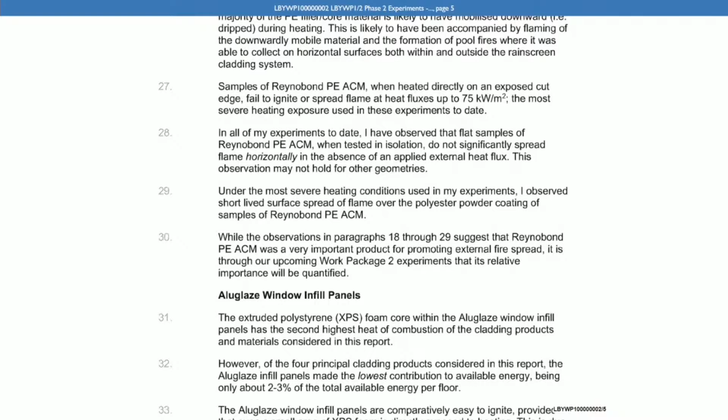That's a very difficult question to answer. The footage that we assembled at phase 1 didn't show any obvious surface spread of flame over those panels in the early stages of the fire. As the fire grew, it's very hard to say where that spread of flame was occurring, whether it was a consequence of burning of the polyethylene core or a consequence of the powder coat. So that's a very difficult question to answer. The amount of energy that would be liberated by any burning of the surface coating would be very, very small in comparative terms if you compare it to the amount of energy that can be liberated from the polyethylene core. So I wouldn't think, and I think I intimated as such in my report, that this is a hugely significant observation.

Then if we look at the heading below that, it says Aluglaze window infill panels. Let's look at paragraph 33 there, still on page 5. You say: the Aluglaze window infill panels are comparatively easy to ignite, provided that even a small area of XPS foam is directly exposed to heating. This is due to the low thermal inertia of XPS foam. It is noteworthy that the low thermal inertia is also the reason that XPS foam is desirable as a thermal insulation in buildings.

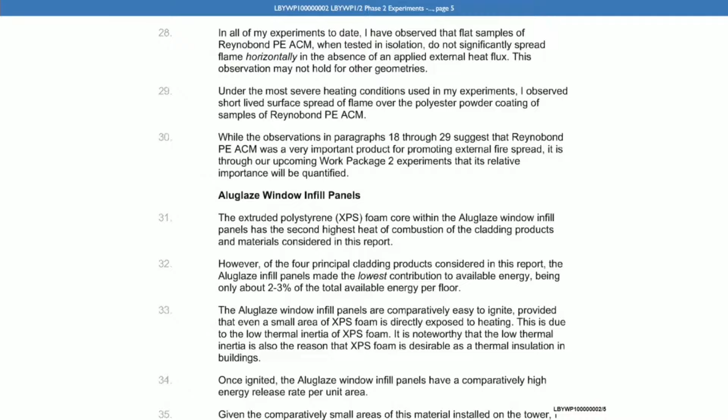Now, given the conclusions that you've derived from your experiments in relation to the Aluglaze infill panels, are you able to reach any conclusions on the potential contribution of the ignition of the Aluglaze infill panels to the ignition of other elements of the facade?

Again, challenging to say definitively. The reason that comment is in there is because we have evidence from phase 1, from memory, that suggests that the extract fans located within small pieces of infill panel, essentially the same product, in the kitchen windows of the flats, flat 6s all the way up the building, softened and fell out quite early on in the fire. And certainly the footage that we have from the fire of the kitchen window of flat 16 early in the fire suggests that the extract fan had fallen out, and there you can see a circular hole in that small panel of window infill panel material.

If the extract fan falls out of that infill panel, then around the circumference of the hole where the fan was sitting, you will have had exposed XPS foam insulation. That foam insulation is quite likely to have both softened and melted and dripped and ignited, and will have contributed to burning in that location and will have contributed to flaming that is likely to have impinged on the ACM. So that's quite a long-winded answer, but I think the answer is it's certainly possible that ignition and burning of the XPS core of the window infill panel that was holding the extract fan will have contributed to some extent.

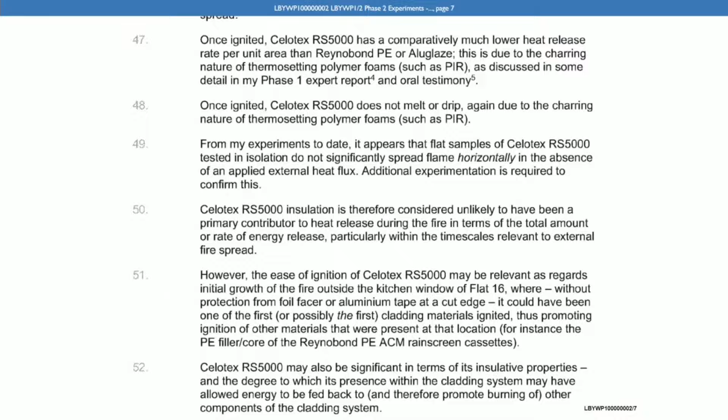Can you explain the mechanism by which the ignition of the RS5000 may have promoted the ignition of the PE filler, PE core of the Reynobond PE ACM?

Simply that if something ignites and starts to burn, then it's going to liberate energy. That energy is going to go somewhere, and if it goes into the ACM, heats it and starts to mobilize the polyethylene, which can then ignite, that would be the mechanism. The mechanism is simply that burning of the insulation liberates energy that could then be used to heat the ACM and cause its burning.

And what about other elements of the facade? There were other things in the cavity. You had the UPVC window frames, which would have been adjacent to that location, which can burn. You will have had EPDM rubber membrane around that location, which can also burn. You had spray foam, bits of timber, various other things in the cladding system at that location.

So there's a variety of things that could burn in that location, which is one of the reasons why I say it's very hard to say with any certainty what was the first item ignited, and whether the first thing ignited would have continued burning in the absence of the other things is really difficult to unpick.

Are you able to quantify the amount of energy that the RS5000 would have allowed to be fed back to the other cladding components? As I sit here, if we're talking specifically about the configuration that existed at Grenfell Tower, I think no is probably right. I certainly wouldn't want to attempt it as I sit here.

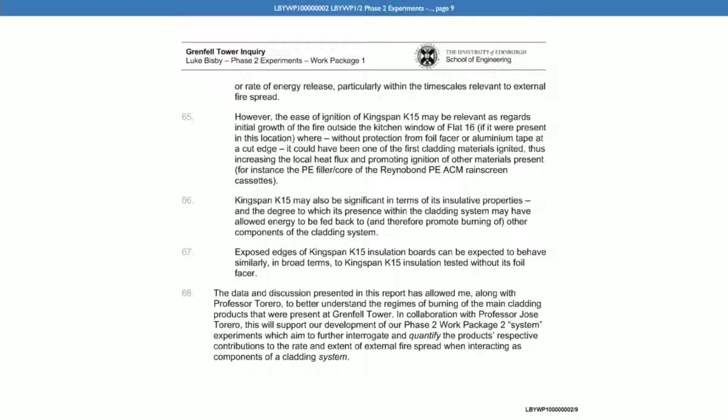And when you say 'could have been,' would you give the same answer in response to the question of quantification? That's right. Yeah, yes.

And if we go to page 26 of this report, please. Page 26, you say this at paragraph 165, at the top of the screen: unlike polyethylene, both PIR and phenolic polymer foam are thermosetting polymers, i.e. they will char on heating rather than melting and dripping or flowing. As a consequence, it is the extent to which PIR and PF foam ignite and spread flame over their surface that is of primary interest, along with the extent to which they do or do not continue to contribute to heat release and flame spread over the timescales relevant to consideration of external fire spread during the Grenfell Tower fire.

Now, given the absence of melting, dripping or flowing from PIR and phenolic polymer foams, what is the mechanism by which the PIR and phenolic foams contribute to the external fire spread?

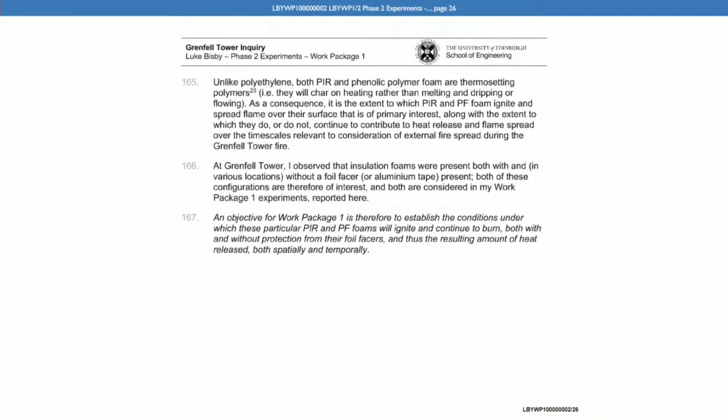By insulating the cladding system and making sure that the heat is retained within the system and fed back to the ACM, which exacerbates the burning of the ACM, and by liberating some admittedly small amount of energy via their own combustion, potentially by spreading flame, although I think the flame spread characteristics are probably not that significant, particularly if you had a foil facer in place.

Yes. Now, if we then turn to page 27, paragraph 169, under the heading Products and Materials Under Investigation, paragraph 169: I decided, however, not to use the cladding products removed and retained from Grenfell Tower for my Phase 2 experimental programme. I made this decision because I felt that I would be unable to guarantee adequate control by others, either of the chain of custody for these products or the specific origin of the various samples, nor could I be completely certain that the products had not been damaged in some way due to their installation on the tower, their in-situ service experience, some exposure to heating during the fire, or mechanical damage during their removal.

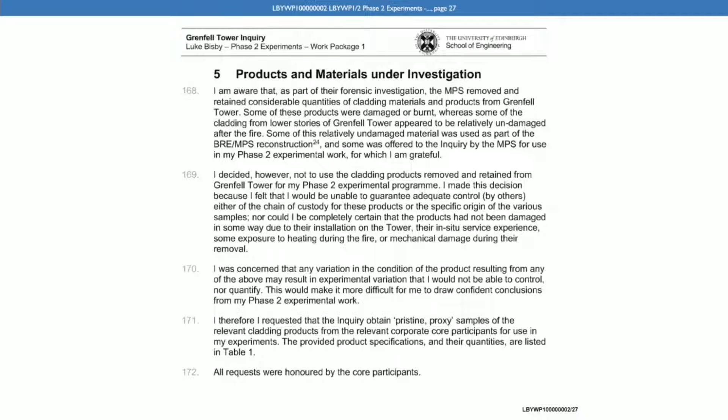Do you consider that, as a consequence of that decision that you've described there, you would have been unable to take account of any alterations or modifications to the cladding products which resulted from the manner in which they were installed, or the means by which they were affixed to the facade of the tower?

None of the experiments that I've performed intended or even tried to simulate or reproduce those issues in any way that I would say is directly applicable to Grenfell Tower. We were much more interested in understanding the mechanisms by which the different behaviors would be, and then the mechanisms by which those behaviors would manifest in the product. So no, I don't think I would agree with that statement.

Right, but focusing on the consequences of your decision not to use the cladding products removed and retained, did that materially, or should that materially, affect the conclusions? No.

So do we take it from that you didn't think it was necessary to take account of the exposure of the PE core resulting from the installation of the product in cassette form?

In the experiments that I performed, we did certain things to the ACM panels, certainly in the work package 2 experiment, that were intended to ask questions relevant to whether the panels were installed in riveted form or cassette form. For instance, as I showed in my presentation, we intentionally routed the rear face of the ACM panel, the face facing into the cavity, in our work package 2 experiments, because we recognized that the separation or removal of the inside aluminium face in a cassette configuration would probably drastically affect the burning behavior, and that's certainly something we observed.

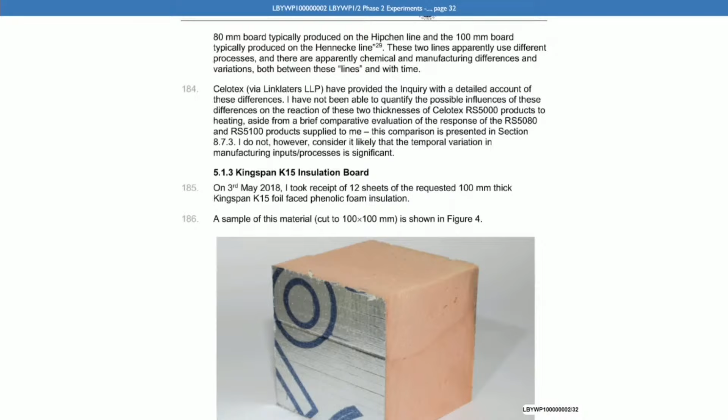What do you mean there by temporal variation?

So I'm not a polymers chemist, nor someone who manufactures polymer foams, but the base chemistry of these products didn't change a whole lot. It seemed to me in reviewing that information that there were little tweaks and changes made by manufacturing operatives, probably based on things like facility temperature or ambient relative humidity. I don't know, so I'd hesitate to put too much stock in that. If the inquiry feels changes in chemical inputs over time warrant investigation into possible outcomes for the resulting product, I'd insist the inquiry ask a polymers manufacturing specialist rather than me.

It's really the word temporal I was asking about. Yeah, temporal, I just mean in time. If you look at the data we were provided, from memory it was quite some time ago that I looked at this. There are little adjustments made to the manufacturing process over time, and I felt that was probably unlikely to significantly alter the outcomes of what we'd observe if we tested a piece of the product. It's not going to vary significantly any of the reaction to fire properties we looked at, in my view, heat of combustion, critical heat flux for ignition, those sorts of things. I wouldn't expect to see differences.

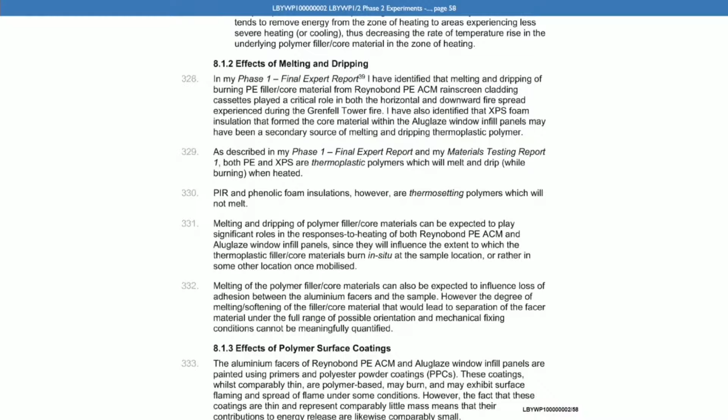I mean that it matters, in simple terms, where the energy goes, or if the energy goes. These materials - the polystyrene, the XPS, and the polyethylene - are quite calorific materials. They have high heats of combustion, and where and when that energy locked up in the material is released matters. So if you have a lot of mobilization of the polyethylene, it's no longer where it started, and where it goes matters.

So if the polyethylene drips out of the cladding and into the atmosphere and falls through the sky and lands on the pavement at the base of the building, which we did see some of, then the influence of that burning polyethylene on the cladding fire locally has been removed.

If the polyethylene drips and pools in the shelf at the bottom of a cladding cassette - these cladding cassettes on the tower, certainly the spandrel panels, the face of the panel comes down, comes in above the window, and there's a little lip on the back of that cladding.

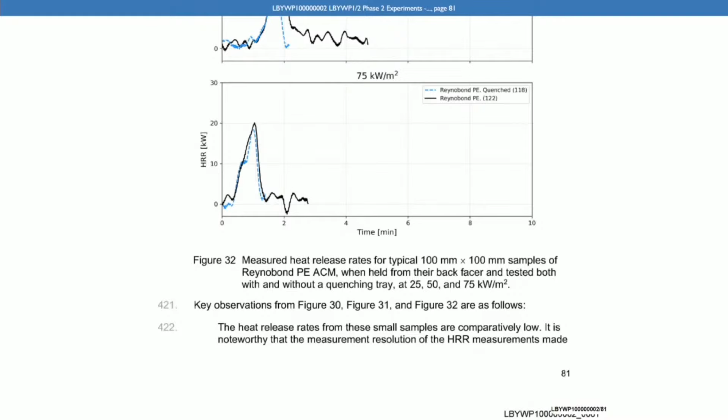Yes, 422. The heat release rates from these small samples are comparatively low, you say. It is noteworthy that the measurement resolution of the HRR measurements made by the University of Edinburgh's furniture calorimeter is insufficient to provide high-fidelity data for such low heat release rates. However, this does not affect the conclusions drawn from the data.

Then you go on to say... yes, I think that's probably enough for my question.

Is it your opinion that a feedback loop existed during the fire at Grenfell Tower? Yes, there's always a feedback loop when a fire grows. And are you able to identify the elements of the facade which would have contributed or created this feedback loop? Anything that had a heat of combustion will have contributed to some extent to that feedback loop. Right, and what would that include? Can you identify the elements?

In order of decreasing relevance, I can try to do that. First and foremost, the ACM PE, then the insulation products, whether Celotex or Kingspan at any given location. And then all of it, really - any timber that might have been there, UPVC window frames, window surround insulation, EPDM membrane, spray foam - anything that could burn will have contributed to some extent, however minor in some cases.

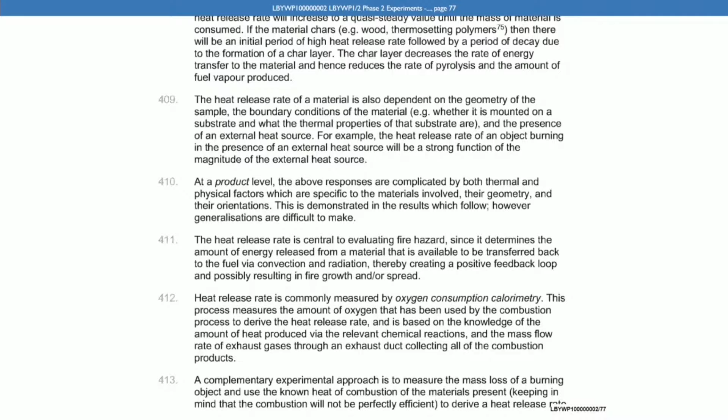Now, the heat release rate that you've generated - does that come from all of the components, or each one combined, each one individually? The heat release rate that one measures when one observes a fire is going to represent, typically, if you're measuring the way we did in the experiments in the lab at Edinburgh, the total heat release rate that comes from everything that may be burning. So yes, everything.

And when you say via convection and radiation, are you describing there - and I don't want to put words in your mouth - the effect of heating when a pool fire in a drip tray on the inside of the cassette on Grenfell Tower heats the insulation and creates rising heat, radiates but creates rising heat?

I mean, which paragraph is that in again? 411. I mean, yeah, I think 411 could be read almost without 'via convection and radiation' - those words are probably not necessary.

The key idea in that paragraph is that when you have heat release, the heat release rate is telling you how much energy is being released per unit time. And the more energy you have, the more likely it is that that's going to feed back to the fuel and cause the fire to grow. The convection and radiation are just the specific heat transfer mechanisms by which that would occur.

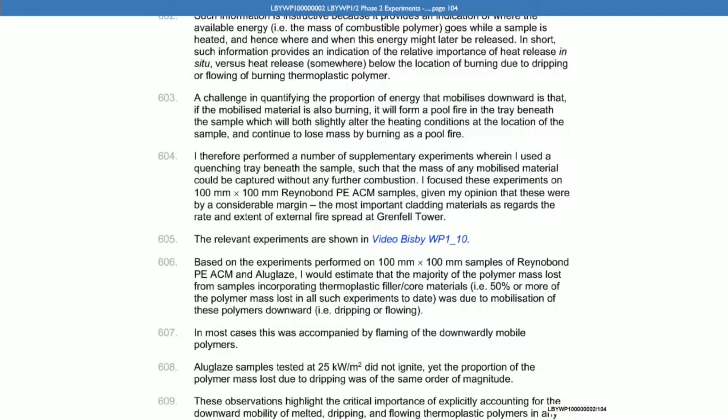Twofold. One, it would have removed energy from the local site of burning and taken that energy somewhere else, where else depends where the polymer goes. And two, in the conditions we observed, certainly for the ACM PE, that polymer is burning whilst going where it goes.

And so if it lands somewhere else and continues to burn, which it appears to have done, then that's a pretty effective downward fire spread mechanism. That's one of the reasons why at phase one I really focused in on the crown detail at Grenfell Tower. The upward fire spread mechanism is pretty straightforward.

The lateral, horizontal fire spread mechanism at Grenfell Tower, which is quite unusual compared to other cladding fires involving these products, I believe is a direct consequence of the presence of the crown, and the fact that the crown provided a mechanism by which the fire could go around the building. The downward spread from the crown is what effectively makes the fire go sideways.

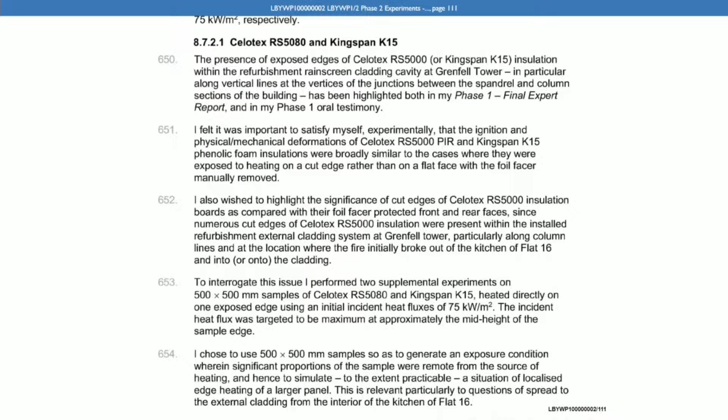I wanted to make sure that what I felt from earlier — this is the work package 1 experiment. So in the work package 1 experiments, as I discussed last week, we did experiments with and without foil facers, and we observed how the insulation products behaved under those circumstances. But those experiments were performed by taking sheets of insulation and essentially peeling off the aluminium facers, so the surface of insulation exposed in those experiments was the front face of the foam panel.

With the aluminium removed, now that is probably, but not definitively, the same situation as you have at a cut edge of the polymer foam, because of the way these products are manufactured. For the Celotex RS5080 product, you have, as I mentioned at phase 1, in-depth glass fiber meshes that are sort of in the insulation in depth within the foam. And also the aluminium foil facer is somehow adhered to the foam in a way that we've not interrogated in any way, so the peeling off may leave some residue.

So there's all sorts of reasons why I wasn't — and we know that the locations in Grenfell Tower where we were concerned about the direct exposure of the polymer foam cores of the insulation products were situations where we had cut edges, not where people had intentionally removed the facers by peeling them off. So I just wanted to make sure there was no substantive difference in behavior under those edge exposure conditions, both because they were the ones that existed actually in the tower, and because peeling the aluminium could potentially result in some differences in behavior. But we didn't observe anything I thought was particularly different, so that work was really just confirmatory.

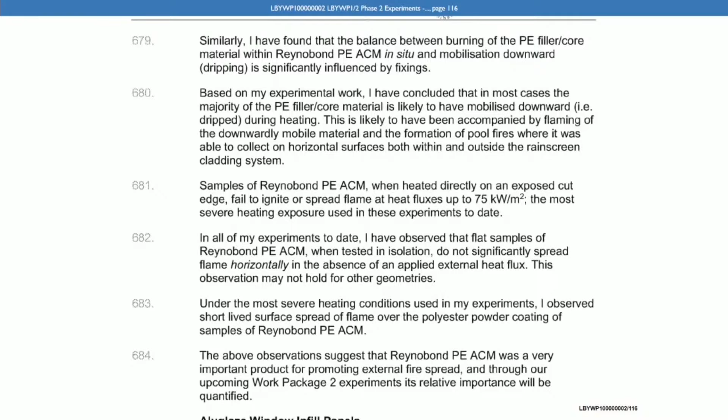Yes, absolutely. And what effect would that burning, dripping, flowing material have on the propagation of the fire? It's going to spread it. It's going to grow the fire. It's going to spread the fire. And pooling? Yeah, I mean, pooling of polyethylene means you're going to have a local pool fire burning with significant heat release. That energy is going to go somewhere. If it heats ACM or insulation, it's going to contribute to combustion of those products, and you're going to have a bigger fire.

And in relation to the horizontal edges, you've described already very helpfully this morning the return internally into the cavity of the cassette with the lip that retains flowing, dripping, melting polyethylene. Are there any other horizontal areas within the cavity other than that return? Yeah, I mean, that was with respect to the spandrel panels that I mentioned, that the column cassettes also have little returns on them, not quite as substantial as the spandrel cassettes. And indeed, at phase 1, I presented some images and some video evidence where you can actually see polyethylene burning in the cladding system, kind of between the cracks of the column cassettes. I think on those horizontal surfaces, you have pooling polyethylene. You can see flaming in those locations in cassettes that look otherwise intact.

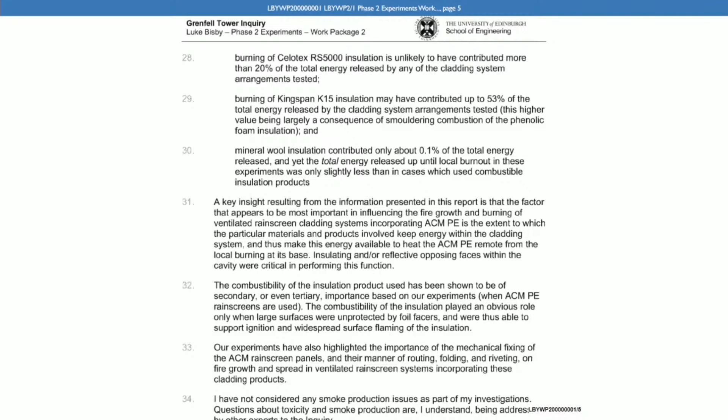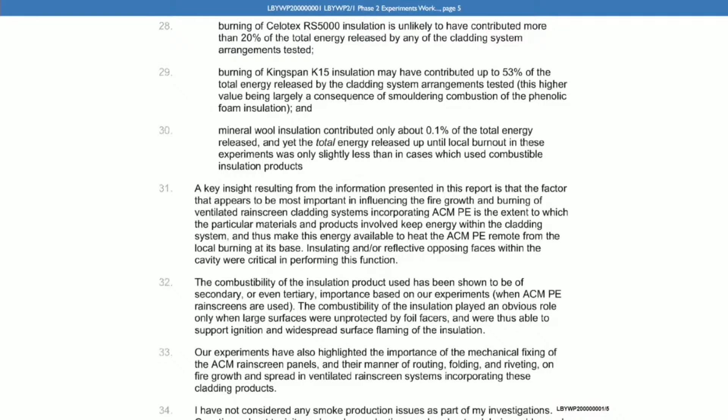If we go, please, to page 5, paragraph 32, you say the combustibility of the insulation product used has been shown to be of secondary or even tertiary importance based on our experiments when ACM PE rain screens are used. The combustibility of the insulation played an obvious role only when large surfaces were unprotected by foil facers and were thus able to support ignition and widespread surface flaming of the insulation. Does that mean that where foil facers were damaged or simply not present, such as on cut edges, the insulation did support ignition and widespread surface flaming?

Yeah, the data that would underpin that paragraph would be data where we looked at the amount of mass that was lost. So maybe I'll step a couple of steps back. As I explained last week, when we performed these experiments, the ACM panel was mounted on a scale that sat on a load cell. And the insulation products were also mounted on a load cell so that we could measure the mass loss with time as the experiments progressed.

That enabled us to, if you know how much mass is lost and you know what the heat of combustion of the thing that's burning is, figure out approximately how much energy might have been liberated by that mass loss. So you can figure out what the contribution of the different products is to the burning by using mass loss as a proxy measure of energy release.

And when we did that comparison and looked at the loss in mass up to the point of escalation to full involvement of the ACM, what we found was that the mass loss from the insulation was only significant when its foil facer was removed, and that in some cases the amount of energy that would have been liberated, using mass loss again as a proxy for energy release, would have been about the same as was released from the ACM. So that's where that comes from. I don't know if that clarifies the question at all.

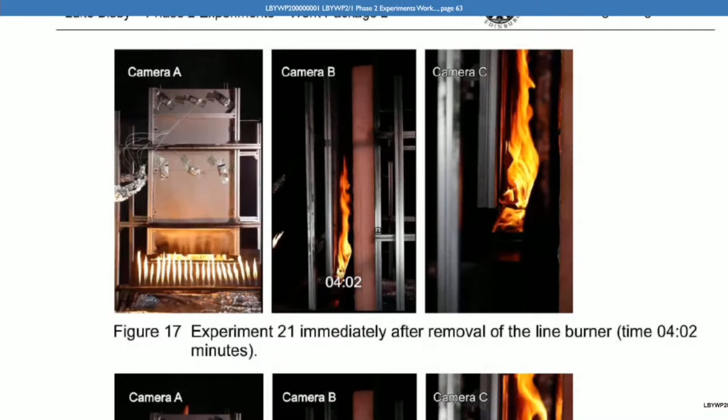Do your experiments in work packages 1 or 2 quantify or measure horizontal flame spread from a single point of origin, as was observed at Grenfell? No. I mean, I guess I might dispute horizontal flame spread from the point of origin as was observed at Grenfell, depending on what kind of horizontal mechanism we're talking about as well.

Fair enough. But, given the small-scale nature, though, of the experiments in work package 2 and the absence of a whole system test, what conclusion, if any, can you reasonably draw regarding the contribution of the insulation to the spread and the intensity of the fire which did occur at Grenfell? That

is a very important distinction, and something that's important to be clear about is that these experiments were focused on growth of a fire from a small fire to a large fire in an upward fire spread mode. The consequent spread of the fire around and down the building is not addressed by these experiments. It's very important to be clear on that.

It's one of the reasons why I laboured the point a bit in the first session this morning, to explain sort of what my view of the lateral and the downward is associated with the burning of the polyethylene, rather than what we might call a classical horizontal or lateral fire spread over the surface of a product.

And if we go to page 121, paragraph 644, at the foot of the page, under the heading Contribution of Insulation to Total Release of Energy, it says: the data presented in this figure are the total energy release that can be expected in cases where the cladding is allowed to burn without intervention until local burnout of the ACM, at which point the insulation also typically self-extinguishes, notwithstanding my previous comments regarding ongoing smouldering combustion of the Kingspan K15 insulation.

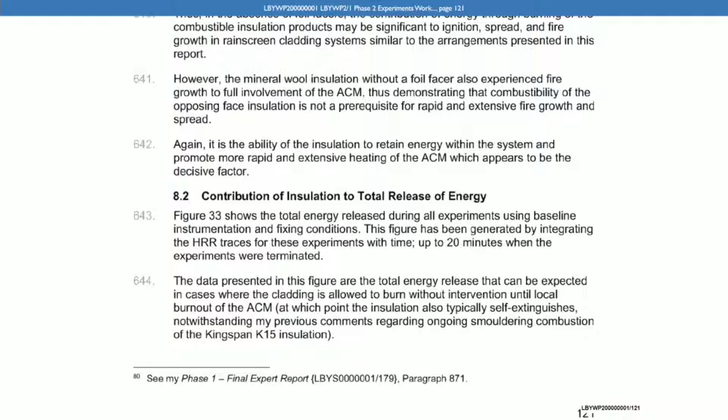What is local burnout of the ACM? It's perhaps slightly imprecise words, but what I mean by that is essentially until the polyethylene's not burning anymore at the location of the fire that we're interested in. So basically the polyethylene, there's no evidence of any further burning of polyethylene, whether within the panel or in the drip tray.

Right. And in relation to the figures of contribution played by RS5000 and K15, of the total energy released until the end of the experiment - I think we probably need the figures for those. Can we go please to, first of all, figure 33 on page 78. Let's have that up first. You showed us this last week. And then again, perhaps have it side by side.

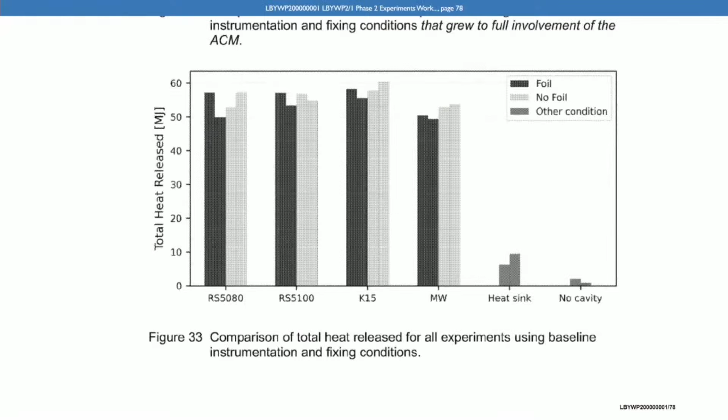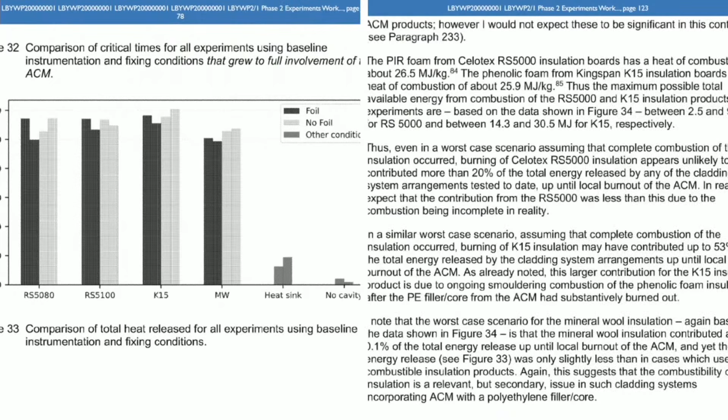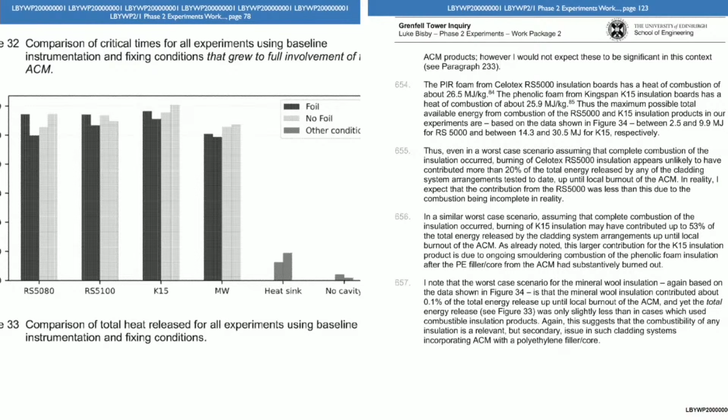Page 123, paragraphs 655 and 656. You can't quite - yeah, that's it. We may have to scroll across. That's it. You give figures there of 20% and 53% up to, as maximums, likely maximums in a worst case scenario, for Celotex RS5000 in 655 and K15 in 656.

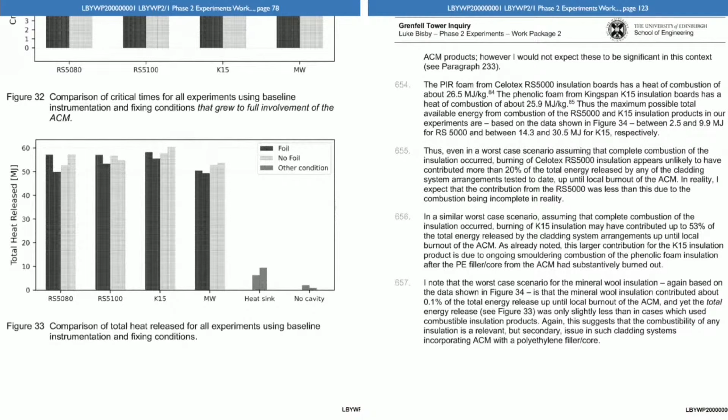Now, just taking that data and those opinions together, is it right that these experiments were terminated at 20 minutes? Yes.

Now, what would have been the impact on your conclusions about the fire at Grenfell Tower, given that it went beyond 20 minutes? It's an interesting question. The end of the 20 minutes was chosen essentially arbitrarily, because in many of the experiments, anything that was interesting that was going to happen had happened, or everything had gone out and there was no further combustion that we could observe from the rig beyond 20 minutes.

So all the burning had ceased, if you like. How that relates to the fire at Grenfell Tower - as I mentioned earlier, at Grenfell Tower, as the fire spread around the building, it ignited compartment fires, which then burned within the compartments for much longer durations. So you had further thermal exposure to whatever products might have been left on the cladding due to the fire plumes, insulation in particular. So any insulation that would have been left after the external fire had spread away, gone away, the ACM was gone - that burning was able to continue because you had fire plumes coming out the windows as a consequence of the flats burning.

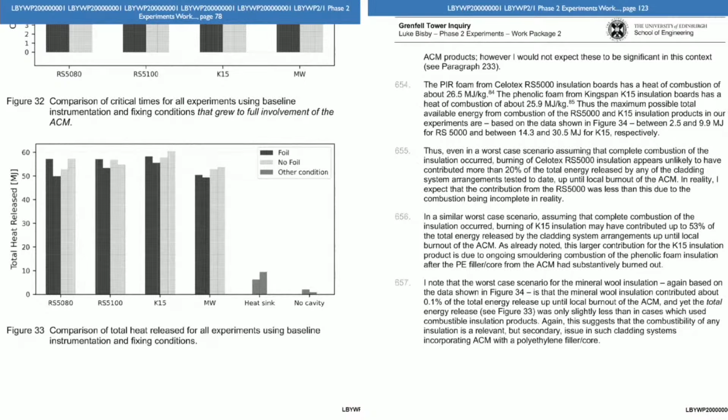Yes. If you take that mass loss and you multiply it by the heat of combustion, you get the maximum conceivable amount of energy that will have been released by that product. And that maximum conceivable assumes that the combustion is 100% efficient. And I think that is the basis upon which these numbers given here in these specific paragraphs are calculated, yes.

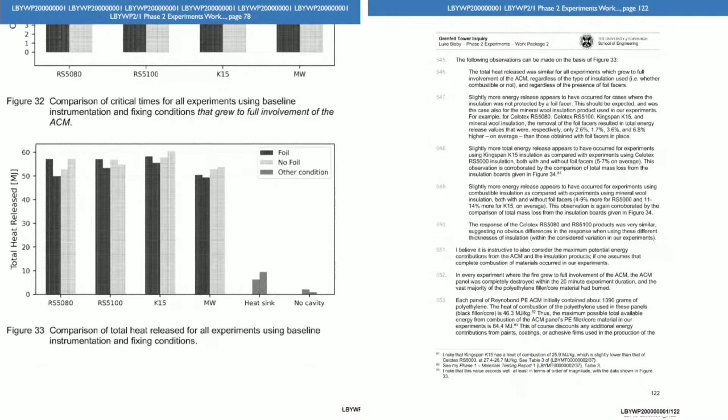Well, let me try and help you. If you go back a page, please, to page 122 on the right-hand side of the screen, you can see what the observations are that are the basis of figure 33 and the methodology you adopted there, just to remind you of what it was.

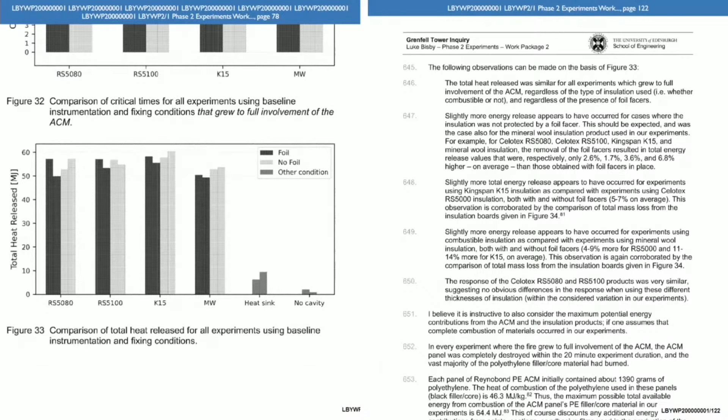Yeah, so that'll be based on the full 20 minutes. So the question is, is it the case that your calculations don't compare like for like, for two reasons? The first is that they mix different timescales—one is that you're measuring total mass loss over the full period of the test, but...

you're also measuring heat released by the ACM up to the point of local burnout, which is earlier on. We did do the two different things, yes, but I think here we're just presenting the 20-minute mass loss as a maximum conceivable value.

Right. Let me ask it slightly differently. Is there any material flaw in the assumptions where you are measuring heat release up to the point of burnout in relation to the ACM, but up to the end of the experiment through the mass loss in relation to the insulating products?

Okay, I think I see what's happening here. I think that Figure 33 is presenting the area underneath the heat release curve, if you like, for the experiments. Whereas the numbers that we're discussing are based on the total mass loss from start to finish. And the question is, which of those is the fairer comparison, I think is the question.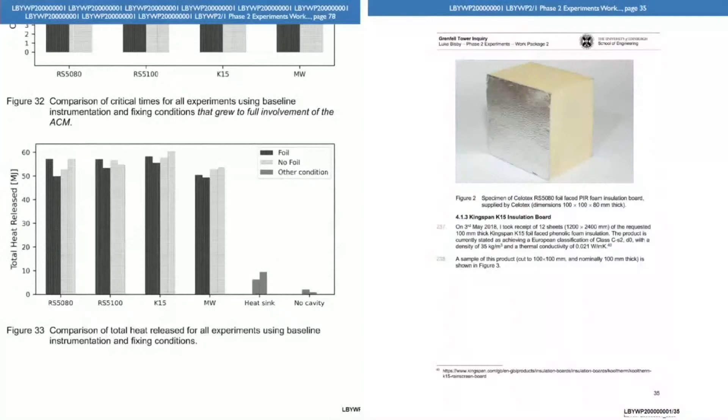Now, if we go to page 35 of your report, paragraph 239 - we don't need to read it all - starting at the top of page 36. You identify the mineral wool insulation in the middle of 239, and in the second sentence you say the specific product chosen was a Rockwool duct insulation lagging product marketed under the trade name Ductslab. I think it's right that was classified as Euroclass A1 and non-combustible under the national classification system, yes?

Yeah. As far as you are aware, is that a foil-faced insulant? Yes. And marketed in the UK as a rain screen insulation product, yes? I don't know if it's marketed as a rain screen insulation product. I mean, it doesn't really matter to me how it's marketed - what I'm interested in is that it's a non-combustible mineral with a foil facer.

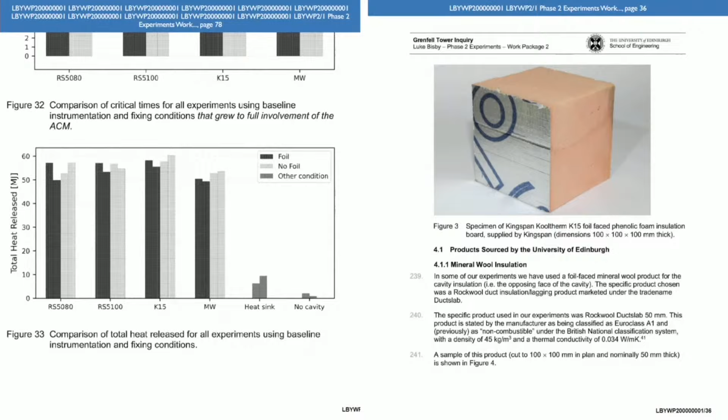Right, now I want to ask you one or two questions about BS 8414 - we'll come to the topic in more detail later. But in relation to the tests done under BS 8414 Part 1 carried out by the government following the Grenfell Tower fire, is it right to say that the nature and rate of flame spread on cladding systems incorporating foil-faced PIR and unfaced mineral fibre insulation behind PE core ACM have been found to be comparable at large scale and at intermediate scale?

Could you run that past me again, with apologies? Yes. Is it right to say, given the tests done under BS 8414 by the government after the Grenfell Tower fire in 2017, that the nature and rate of flame spread on cladding systems incorporating foil-faced PIR and unfaced mineral fibre insulation, both in each case together with a PE core ACM rain screen, have been found to be comparable?

I mean, nature and rate - I don't know that we necessarily learn that much about the nature and rate from a BS 8414 test, which would be the basis upon which that question is posed, referring to the post-Grenfell DCLG tests, I presume. Yes. It is the case that in those tests the test with mineral wool was terminated at a similar time to the tests with polymer foam insulation. But I think, from memory, the mineral wool was used without a foil facer, whereas the polymer foam insulations had foil facers, so there's a mild distinction there.

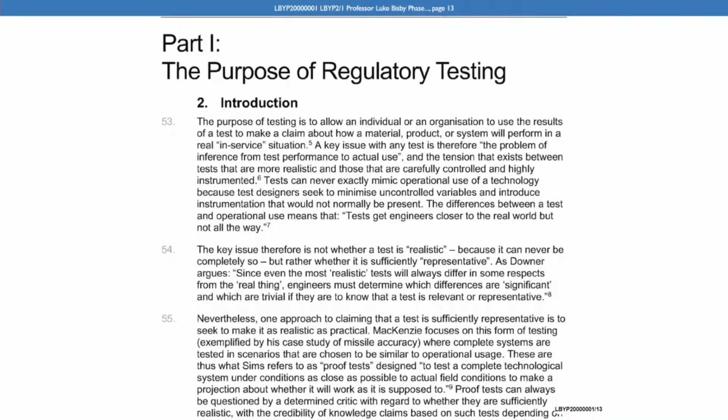Now, you use expressions there, but we'll come back to this point in relation to large-scale testing later. Can you explain in summary why it is the case that the question is not whether a test is realistic, but whether it's sufficiently representative? Why is that a relevant point? Can you explain the distinction, and the reasons for your drawing it?

Well, because of what it says in the first line of that paragraph, which is that the purpose of testing is to allow an individual and organization to use the results to make a claim about how a material or product will perform in a real in-service condition, and because one can never devise a standardized test that will reproduce exactly the end-use conditions of a product. That's just not a practicable approach to testing. So one has to come up with a test that asks the questions that allow oneself to make a claim about how the in-service performance is going to be, recognizing that the test cannot reproduce reality. So designing tests that ask the right questions, that are representative of the things that one wants to know about a product, is the trick with these tests.

If we go to page 15, paragraph 64, you explain there as follows: Testing for fire safety needs to achieve two main purposes. First, and most importantly, it should enable regulation that achieves societal objectives with regard to safety. Second, it needs to be practical in operation, providing reasonably consistent results without being overly burdensome in cost and time.

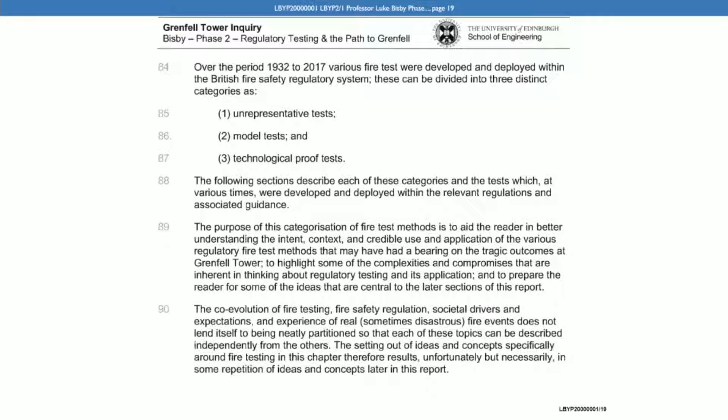No, that's a local taxonomy, if you like. It's mine. It's yours? Well, mine along with colleagues who I was working with on this report, so Graham Spinardi, who I've mentioned in Appendix A. It's Grenfell specific, your work specific?

Correct. I see. Now, am I right to understand that it's important to understand the difference between these types of tests, the purpose of developing them, and what they were intended to measure or demonstrate, in order to understand the limits of their credible use and application?

Yes, I think it's important to think about what these different types, which is why this taxonomy has been written down in this report. I think it's important to think about different types of tests, the basis upon which they were developed, how realistic or representative they are, and therefore what burden of responsibility lies with those people who use those tests.

And would it be right also to say that certain relevant fire safety tests in the UK were implemented and used in practice in the period before Grenfell in ways which did not align with the intention, the logic, and the limitations of the tests themselves? That's my view, yes.

And we'll come to some specific examples of that shortly. But is the reason for that non-alignment regulatory influence? Is that one of your rationales? I think, by regulatory influence, you mean the influence of regulatory processes by industry, for instance, or? Well, is it the case, it was a bit of a cryptic question perhaps, is it the case that because the deployment of these tests within statutory guidance and practice, specifically ADB, gave them a specific status that might have tempted people to ignore or perhaps misunderstand their applications?

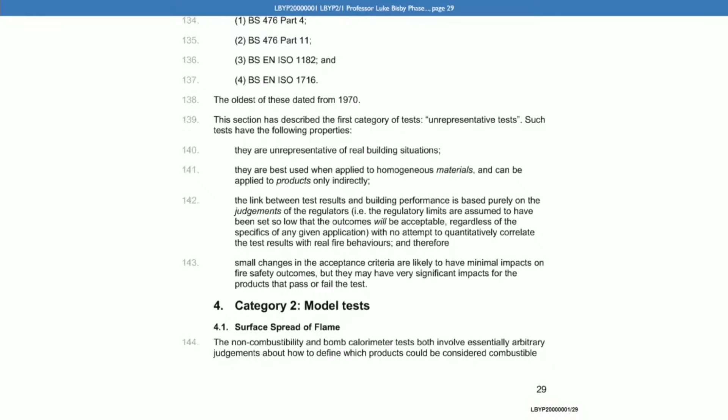Right. Now, if we go to page 29 in this report, let's look together at paragraphs 140 to 143. You've set out the tests above that at paragraph 133 - the BS476s and the BS ENs there, the oldest of which dates from 1970. And you've set out a list of characteristics at paragraphs 139 to 143.

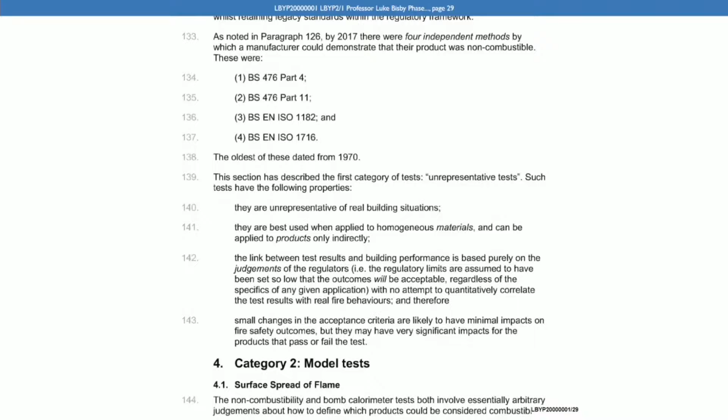Are the tests that you list under that category those which deal with combustibility? Part 4, part 11, 1182 - yes, they are. And I think you then provide an overview of the history of the development of combustibility test methods at page 20, paragraph 93, and you describe that as the potential of a material to burn. Is that correct?

Correct, so that's what you mean by combustibility. In non-regulatory terms, yeah. Combustibility would mean the potential of a material to burn - a material that can react with oxygen and thereby liberate energy in the form of heat and light. Strictly speaking, anything that has a heat of combustion is, strictly speaking, combustible. So combustibility is, if you like, an on-off switch. It either is or it isn't.

In regulatory terms, the regulatory system chooses to blur that a bit and decide that some materials that have a very, very small amount of combustible content - i.e. content that could react with oxygen and release energy - can be deemed to be non-combustible. That doesn't make them non-combustible, it means they are deemed to be such.

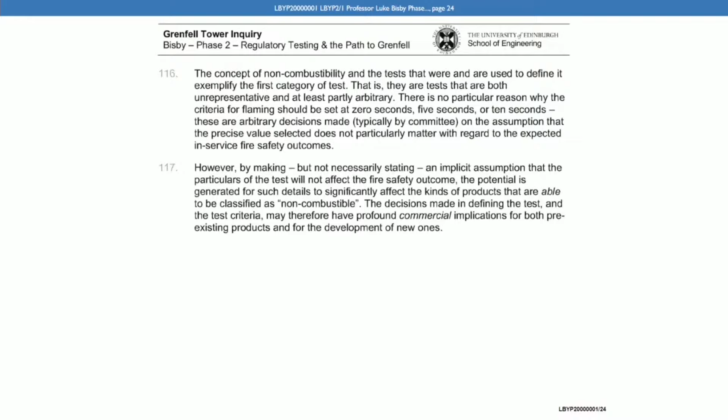Now, in the third line just before that sentence, you say 'at least partly arbitrary', and then you go on to identify the timing criteria for flaming. Are there any other criteria which you would say were arbitrary?

All of them are at least partly arbitrary. So in the Part 4 and Part 11 tests, the chamber that the sample is lowered into is heated to 750 degrees Celsius. Why 750? Why not 600 or 900? The answer is because they tried different temperatures when developing the test, and decided that 750 told them what they wanted to know. Going to 900 was probably difficult because it's quite hot to achieve. Going to 600 maybe didn't get things hot enough to observe the behaviors you're interested in. So that's an example.

The size of the samples, the shape of the samples, whether they're cuboid or cylindrical - if you look at the bomb calorimeter tests, ISO 1716 for instance, and look at where the Euro classes decide to draw the line between A1, A2, and B, those decisions were made by a committee of people sitting in conference rooms in Brussels deciding where that line should be drawn. So insofar as these are committee decisions taken by individuals, they are arbitrary. They're not based on science - it's not a fundamental scientific truth. It's a decision that's taken.

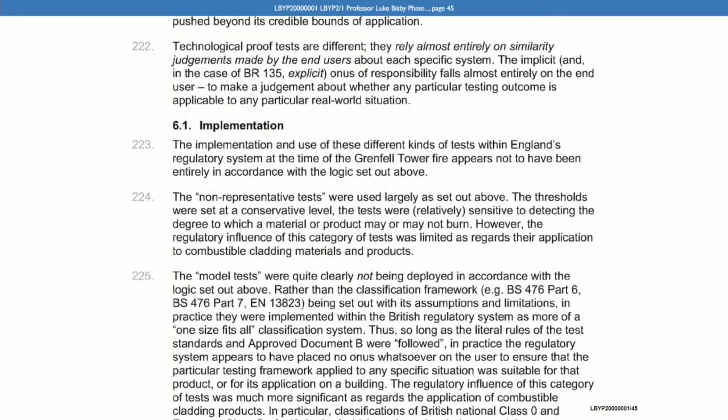Well, if we're thinking about the Euro classification, the European classification system, it uses ISO, the bomb calorimeter test and the furnace test, similar to 476 Part 4 or 11, to define A1 and A2 classifications - the non-combustible, limited combustible classifications. Once you get down into B and lower - B, C, D, E - those tests aren't relevant anymore because the products aren't non-combustible or limited combustible. So the differentiation between combustible products is made not on the basis of the potential energy contribution or heat of combustion. It's made on the basis of their reaction to fire, predominantly in an SBI test.

Yeah, I follow. So you're really just focusing on the upper end of the scale in that sentence. Yeah, what I'm trying to tease out is that the heat of combustion is used to draw a line that those who drew it considered - based on my assessment, I wasn't in the room - quite a conservative line. A material with a heat of combustion of less than 2 megajoules per kilogram, to use my language from last week, is not a very burning material. No matter what you do to that material, the amount of energy you're going to liberate is comparatively small. So you could have drawn that line at 10 or 30 megajoules per kilogram, but they didn't - they chose 2. The reason is because they wanted a conservative line, despite acknowledging they were allowing some contribution to burning, just very, very small.

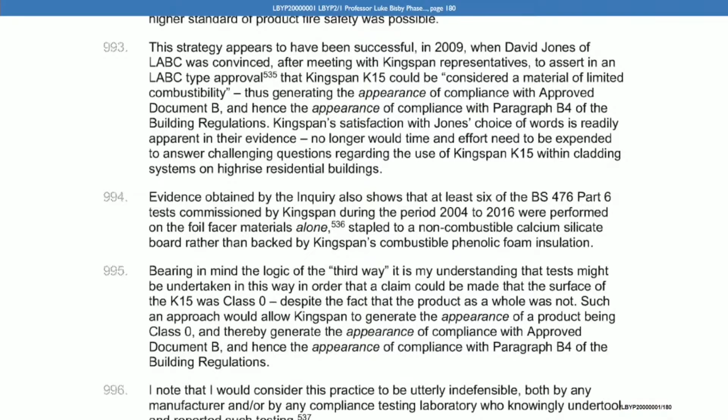Bearing in mind the logic of the third way, it is my understanding that tests might be undertaken in this way in order that a claim could be made that the surface of the K15 was Class 0, despite the fact that the product as a whole was not. Such an approach would allow Kingspan to generate the appearance of a product being Class 0, and thereby generate the appearance of compliance with Approved Document B, and hence the appearance of compliance with paragraph B4 of the Building Regulations. I note that I would consider this practice to be utterly indefensible, both by any manufacturer and/or by any compliance testing laboratory who knowingly undertook and reported such testing.

And then you have a footnote at 537.

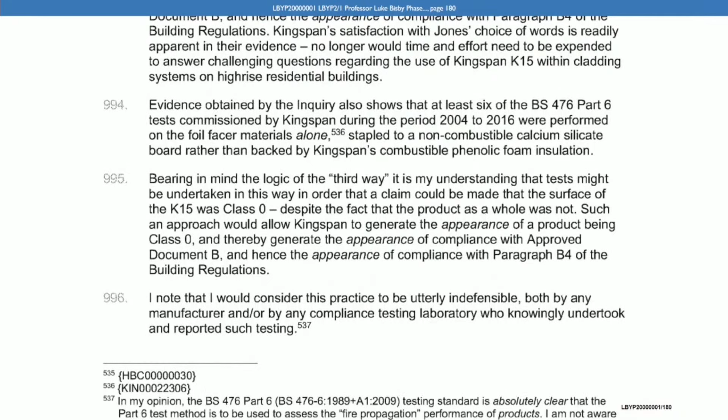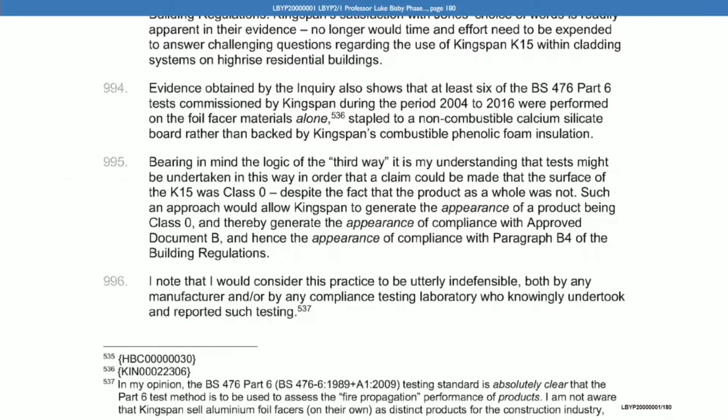In my opinion, the BS 476 Part 6 testing standard is absolutely clear that the Part 6 test method is to be used to assess the fire propagation performance of products, in italics. I am not aware that Kingspan sell aluminium foil facers on their own as distinct products for the construction industry. I do not understand how either Kingspan or any competent testing laboratory could undertake BS 476 Part 6 testing on this basis. I am aware of the view that approved document B could be interpreted so as to indicate that the surface of any composite product can be assessed independently of the rest of the composite product. I consider any such claim to be patently absurd.

In discussing the test specimens to be used in BS 476 Part 6, the testing standard explicitly states that 4.2.2, products of normal thickness 50 millimetres or less shall be used to full thickness, and 4.2.3, for products of normal thickness greater than 50 millimetres, the specimen should be obtained by cutting away the unexposed face of the product to reduce the thickness to 50 plus 0 minus 3 millimetres. The product, in this case, is Kingspan K15 foil face phenolic foam insulation, and so I consider it self-evident that the foil facer must be tested alongside a phenolic foam backing.

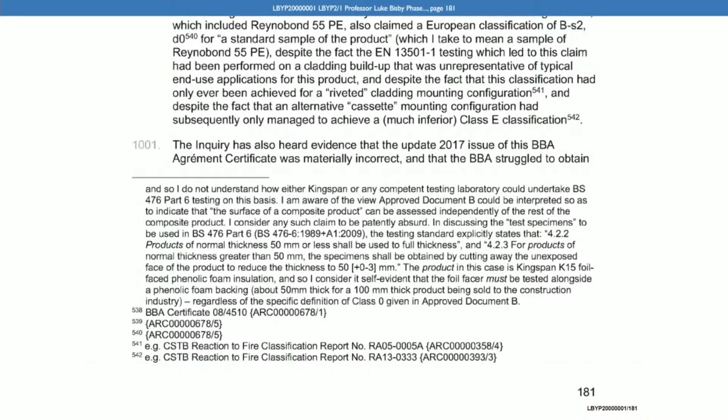You go on to say, with measurements, regardless of the specific definition of class 0 given in approved document B. Now, that's a long footnote addressing a potential interpretation of the regulations and approved document B. Is your reasoning based on your scientific experience, or just on a reading of the language?

My reasoning for what? For the assertion that it's absurd to test the foil facer alone? Correct. I mean, I would argue that you don't need much experience to make that assertion. Frankly, as you can sense from the language I've used here, when I discovered that this was going on, I was absolutely incredulous. I could not believe that this was going on. I refused to believe that it was happening until I saw the evidence.

Yeah, I mean, I guess it's based on my technical knowledge, but I think, to me, it's plainly obvious that you just can't do that.

Now, am I right to understand that for all three of the model tests, BS 476 Part 6 and 7 and the SBI tests, there are 4 of them, I think, in total, which you talk about in this part of your report, the real fire relevance, the reference scenario, is a fire growing inside a compartment or a room or a corridor within a building? That's right. Not an external wall. Correct.

Now, we know that national class naught, achieved by a combination of results from tests carried out under Part 6 and 7 of BS 476, or after 2002 the Euroclass regime, were the classifications recommended in ADB for external walls over 18 metres in height. Do you know why? Do you know the rationale for using Class 0 as a classification regime, or Class B as a classification standard for an external wall, given the reference scenario was a fire inside a room or a corridor? No, I don't know why.

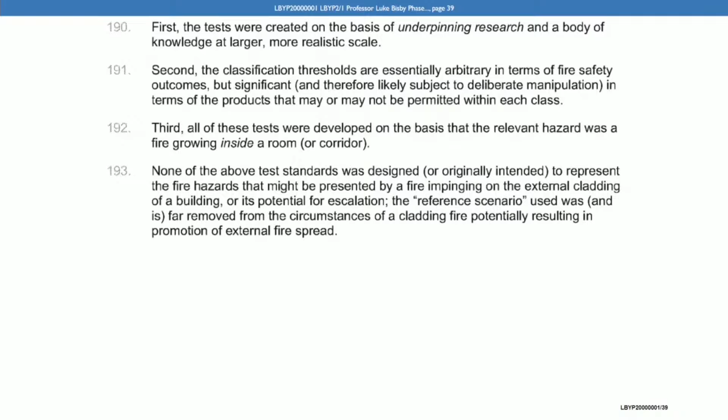And then at 193 you say none of the above test standards was designed or originally intended to represent the fire hazards that might be presented by a fire impinging on the external cladding of a building or its potential for escalation. The reference scenario was and is far removed from the circumstances of a cladding fire potentially resulting in promotion of external fire spread. And my question, showing you all of that, is this: why does that matter?

Why does it matter? It matters because the physics that we are interested in, that govern the way a fire grows and spreads on the outside of a building, are very different than those experienced inside a room. To give one example, all of those tests I've discussed previously, the maximum heat fluxes to which the product samples would be exposed would be considerably less than we'd expect in a cladding fire scenario with a fully developed fire venting from a compartment. So the products are not exposed to representative heat fluxes, would be just one example of one of the differences.

But the scale, the mechanical issues, Professor Torero, I think, outlined a whole host of reasons why cladding systems are complicated in his presentation last week, and all of those factors are relevant.

I would also just add that— Mr. Millett, have you also noticed that the screens have gone blank? Yes, there's mild confusion. I wasn't going to stop you.

I think it's also important for me to say that just because a test is based on a model scenario that is not the scenario you're interested in doesn't mean that the test has no value. It's not that BS 476 Part 6, Part 7, or SBI tests tell you absolutely nothing of interest. They have the potential to tell us lots of interesting things about the way products behave when exposed to fire.